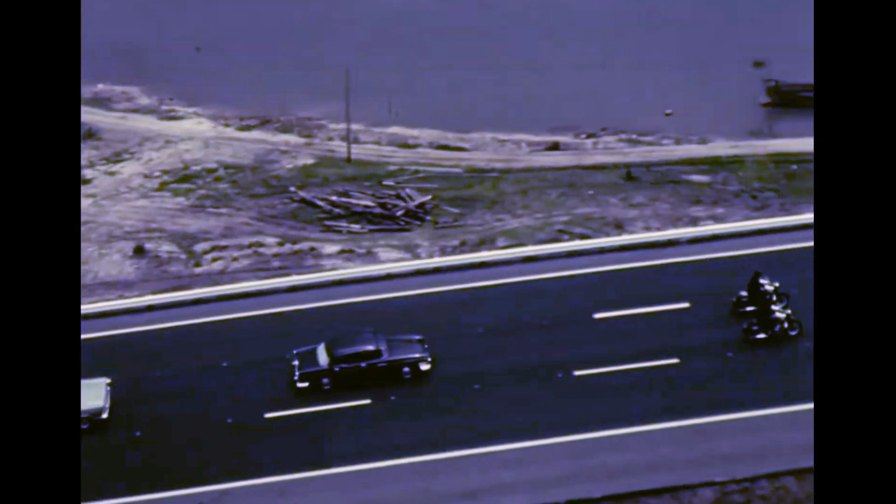Before the motorist could enjoy facilities such as these, many people in various occupations combined their knowledge and skills to plan and execute works of great magnitude. This is the story of those people and the job done by them.

Sydney, now one of the world's largest cities, is the centre of commerce in the state of New South Wales, and there has always been a need for a connection between the state capital and Newcastle, the state's second city and big industrial centre, 100 miles to the north. Early access between the two cities was by sea.

Road connection followed slowly with the old Putty Road in 1820, Wollombi to Singleton in 1826, Wiseman's Ferry to Maitland in 1829, Gosford to Maitland in 1841, and the St Albans route in 1844, all passing around the upper reaches of the Hawkesbury and its tributaries.

A shorter route via the Pacific Highway used a vehicular ferry over the Hawkesbury. The highway, with its easy grades and best possible pavement of the day, was hailed as a great engineering achievement and was a boon to motorists in the 1930s. The Peats Ferry Bridge replaced the ferry in 1945. With post-war development and the increased use of motor vehicles, the capacity of this road was soon outstripped.

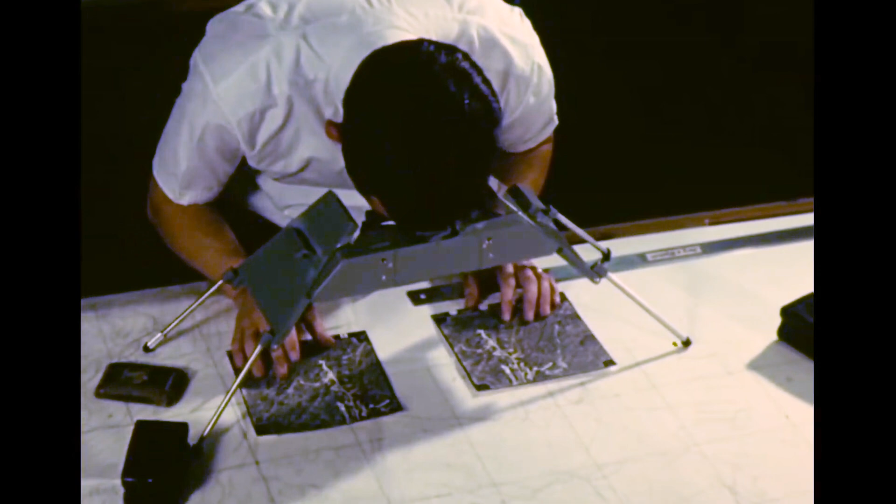In the Department of Main Roads Drawing Office, the road location was fixed, a task made extremely difficult by the need to accommodate an expressway and a highway on the narrow, rugged, steep neck of land between the Hawkesbury and Mooney Creek. Steel splines were manipulated on the contour plans, and aerial photographs examined to achieve the best alignment.

Particular details were examined by constructing models from corrugated cardboard. The Abbott apparatus, comprising cardboard cross-sections supported on retort stands, also assisted in the design. Detailed drawings were prepared. The final plans and specifications were then handed over to the resident engineer of the construction organisation.

The expressway north of the Hawkesbury was built in 3 sections from Mooney Point to Calga, connecting with the new route to Newcastle. A contract was let in 1963 for the construction of the first section of just over 4 miles between Mooney Point and Mount White. This section included an interchange at Mooney Point. It was here at Mooney Point that work commenced.

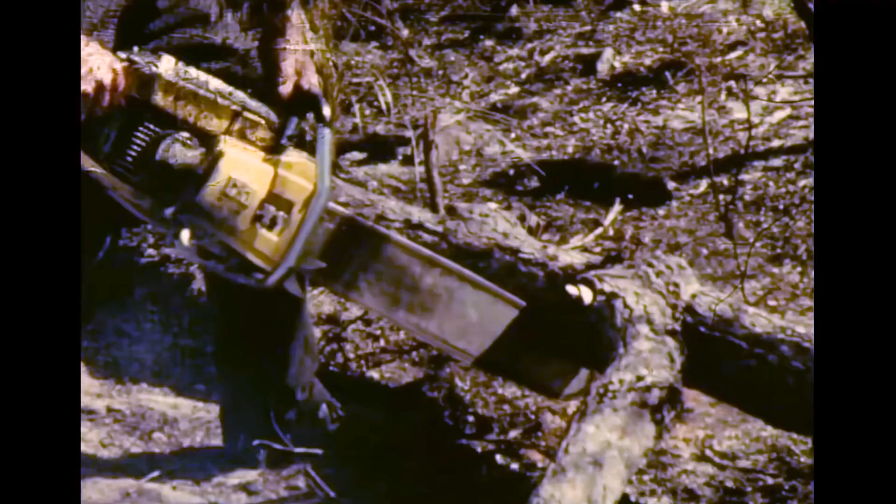Engineers inspect the site at the start of construction. The first operation was to clear the area of timber, which was felled mainly by chainsaw. The width of clearing was kept to a minimum and debris burned within the cleared area.

Before earthworks could proceed at full pace on Section 1 of the expressway, 4 lengths of the existing highway had to be relocated, requiring the construction of 2 miles of road through very rugged terrain, which involved the working of heavy earth-moving plant in confined areas and on steep slopes. Material was moved from cuttings to fills by bulldozers and motorized scrapers.

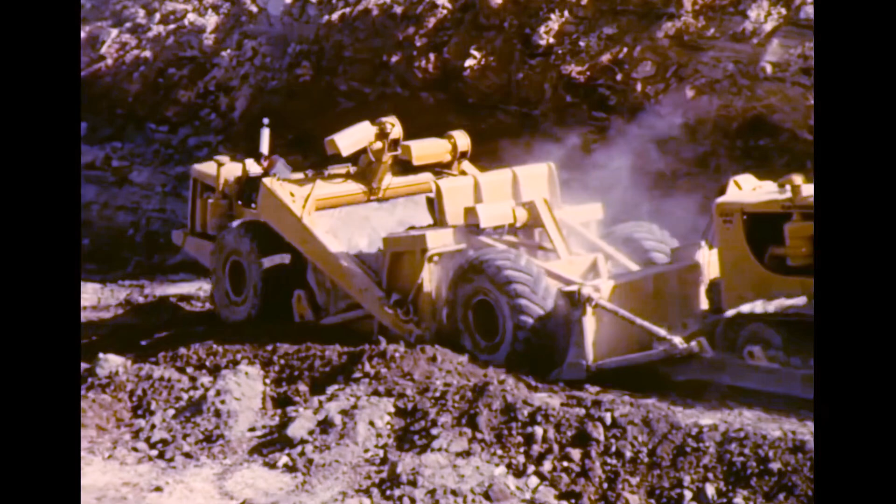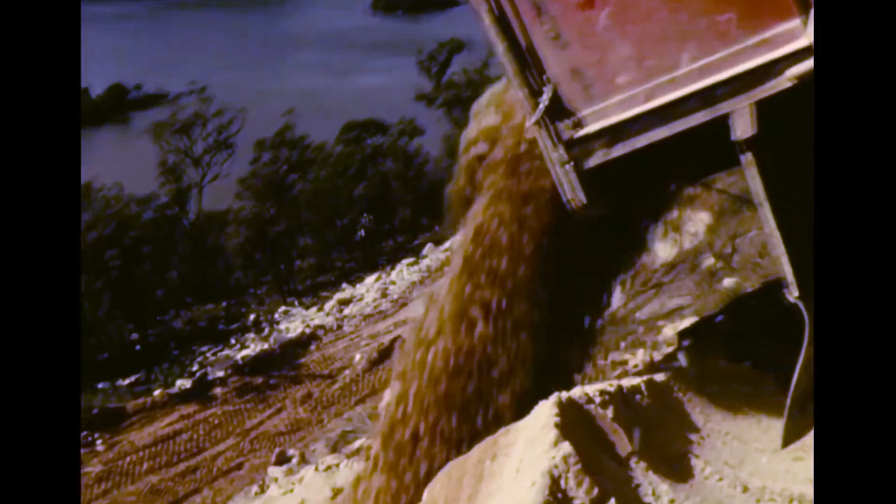When earth-moving plant crossed the existing highway, it was essential in the interests of safety to control the flow of traffic. Rock ledges were removed by drilling and blasting. Tip trucks transferred material from cuts via the existing highway to the fills. After spreading, the material was thoroughly compacted by rolling.

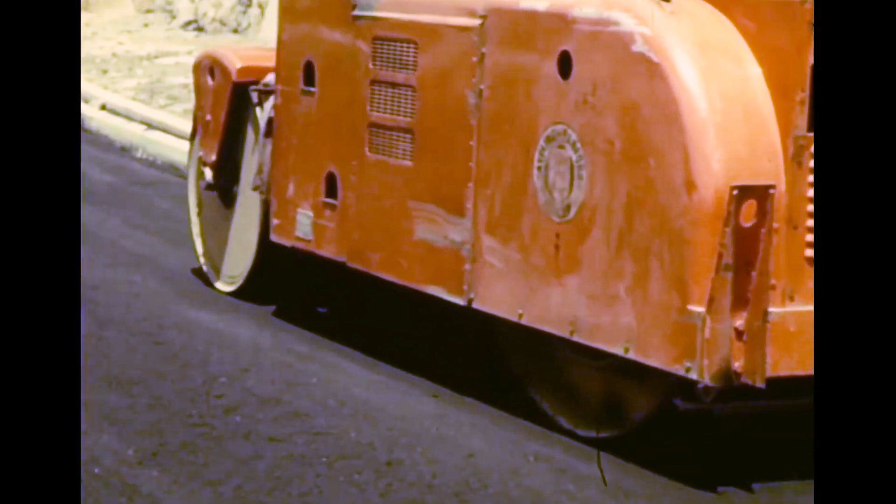Retaining walls constructed with local sandstone block or concrete crib units were required at some locations to support fills. The relocated lengths of highway were paved with asphalt before being opened to traffic. Bridges were constructed concurrently with the relocation of the highway. At Mooney Point, a pre-stressed concrete structure was being built. This shows the completed Mooney Interchange Bridge.

During construction, steel reinforcement cages for footings and columns were placed in trenches, previously excavated to solid rock. Concrete was batched at a plant near the expressway. Mixing was carried out in transit mixers during transport to each bridge site. Concrete was discharged from the transit mixers into hoppers for placing into formwork.

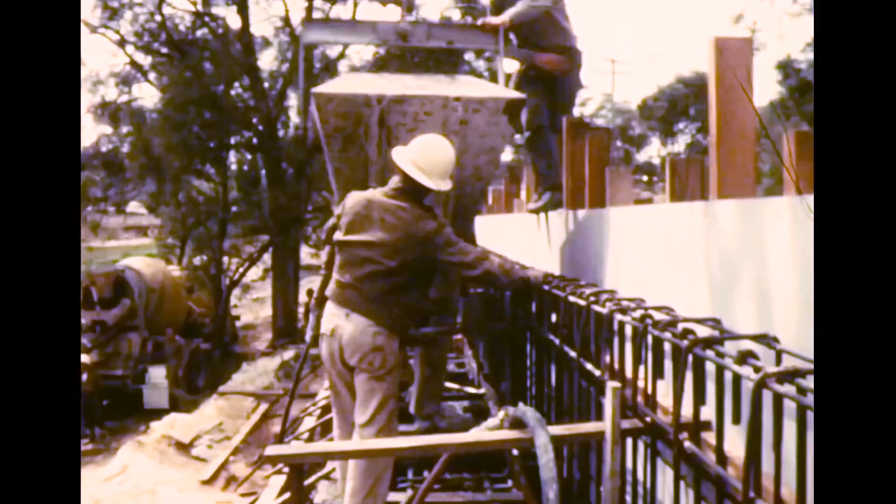Meanwhile, at Jolls Lookout, 2 miles north of the Hawkesbury River, twin bridges, each of 7 spans, were constructed. The narrow ridge between Hawkesbury River and Mooney Creek was not wide enough to support an expressway fill. Bridging was the economical solution. Transverse pipe culverts were constructed prior to commencement of full-scale earthworks on the expressway.

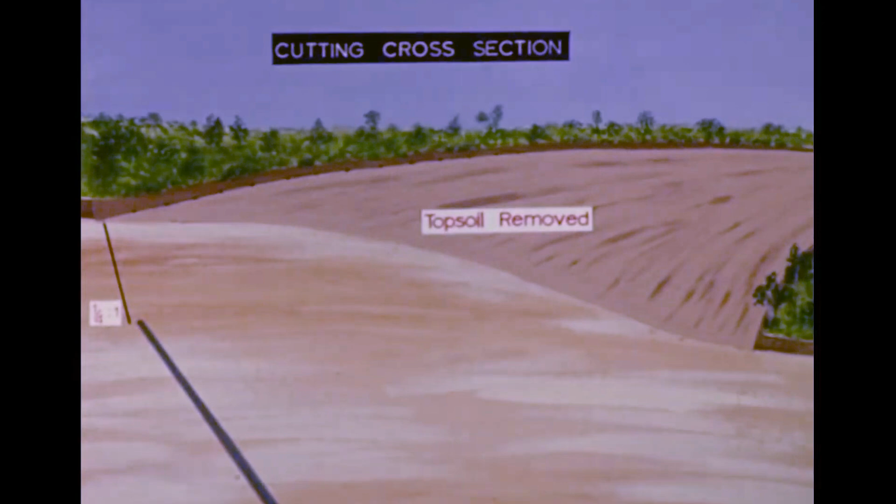Before excavating cuttings, the area was cleared of vegetation. The topsoil was removed and the rock was drilled at a 1/4-to-1 slope for pre-splitting with explosives to form batters. Softer rock was loosened by ripping and the cutting was excavated to median level. The median batters were drilled for pre-splitting. The rock was drilled for loosening with explosives and was removed from both sides simultaneously. The cutting was excavated to subgrade level, but the median was retained as a rock island.

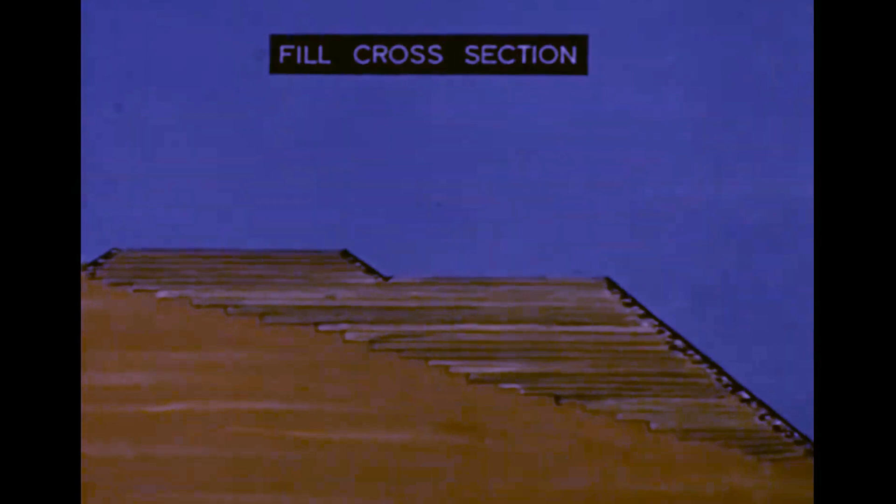Before commencement of fills, the area was cleared of vegetation. Topsoil was removed and the surface benched at 1:10 slope to support the toe of the fill. Material was placed in layers 8 inches thick, the natural surface stepped or roughened in advance of each layer. A rock facing was provided 4 feet wide in advance of each layer as the fill progressed, and the fill slope was generally 1.5 to 1. A sub-base layer, 12 inches thick, was placed above subgrade level using selected sandstone.

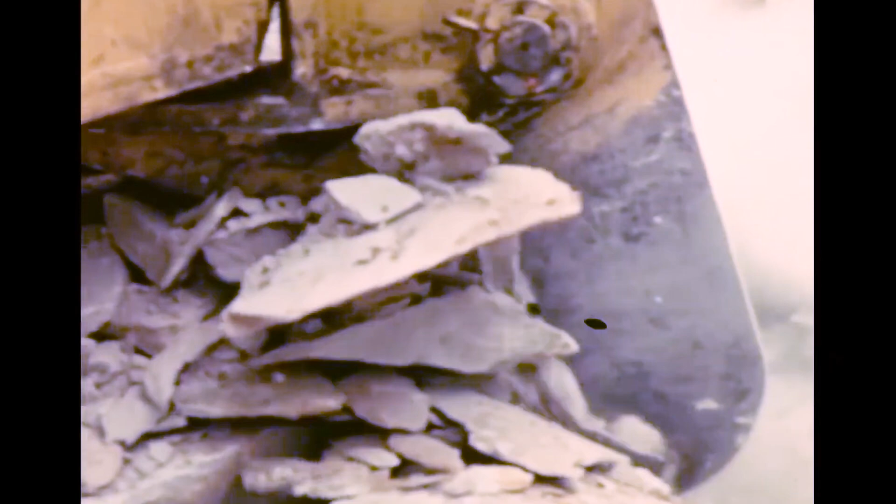On the first section of the work, 2 million cubic yards of rock had to be excavated and moved to fills. In the early stages, all rock was loosened by ripping. Later, it was supplemented by drilling and blasting. The series of delays introduced into each blast resulted in good fragmentation. A mechanical shovel of 2.5 cubic yards capacity was used to load broken rock into trucks for hauling to the fill.

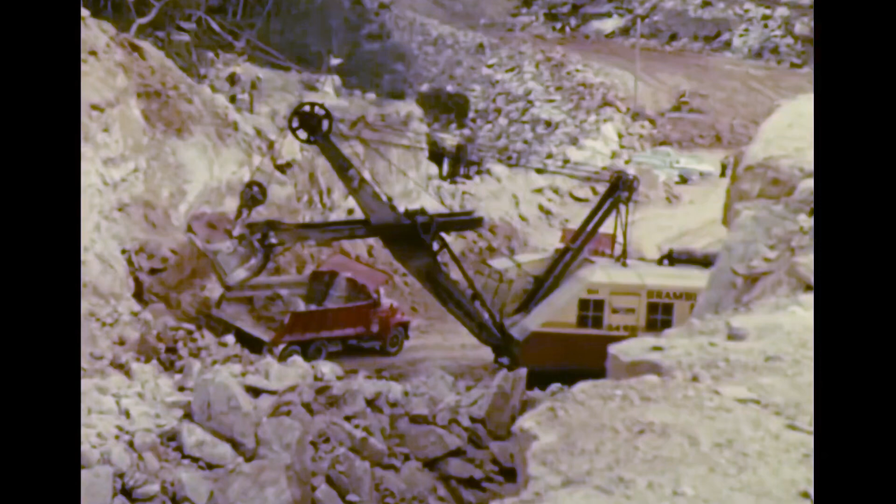Mid-1964, 12 months after commencement, work was well advanced over the full length of Section 1. To give the motorist a longer length of expressway at an earlier date, it was then decided to accelerate the project by proceeding immediately with the construction of Section 2, 1.6 miles long at Mount White, which included the Mount White interchange. One length of the existing highway required relocation. Section 2 was constructed by the Department of Main Roads by direct control, and an engineering organization and depot were established at Mooney.

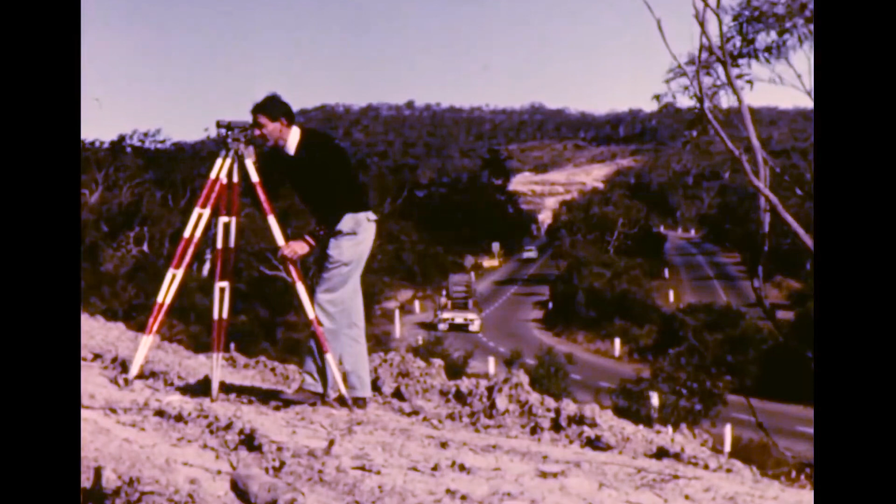Operations were planned in detail using the critical path method to determine the most efficient program for the work. A computer was used to assist with the analysis. Bar charts were produced for use in job control and for recording progress on the work. Earthworks were carefully controlled using survey instruments and coloured profiles to define batter slopes.

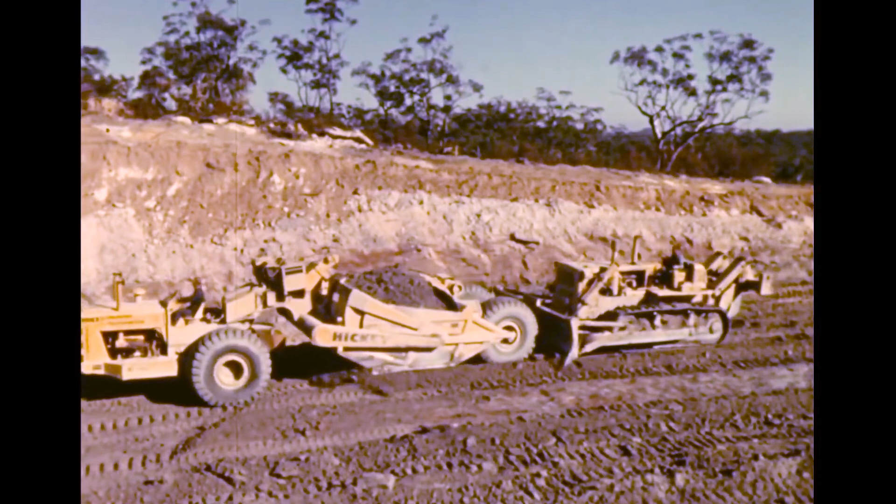About 50% of the rock was loosened by ripping, using the heaviest tractors available up to 425 horsepower. These tractors were fitted with rear-mounted hydraulic rippers using a single tine. Material loosened by ripper was moved by motorized scrapers. These units were capable of carrying up to 30 cubic yards of material at 30 miles an hour. A typical team consisted of 5 scrapers with a tractor dozer push loading and 1 or 2 ripping tractors. Material was discharged from scrapers on the run and spread out in thin layers using bulldozers before being rolled.

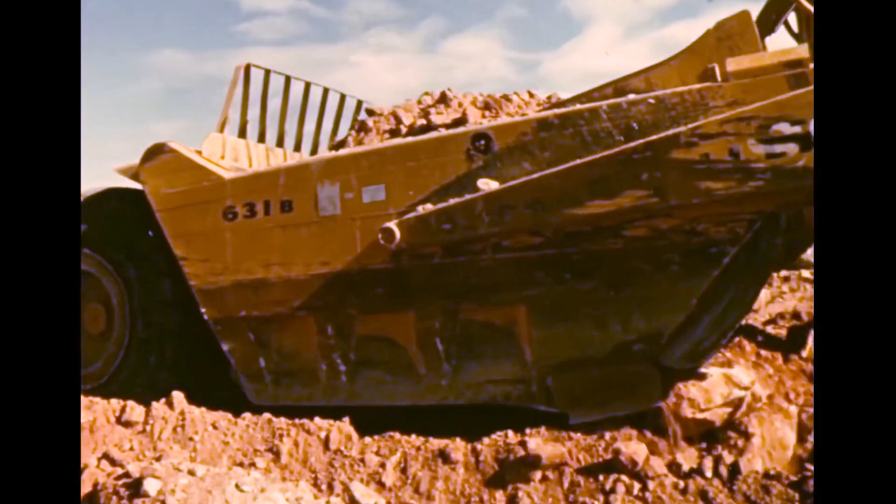With this equipment, outputs of up to 10,000 cubic yards of earthwork per day were achieved. Rock which could not be economically ripped was loosened by drilling and blasting. Holes 2.5 inches in diameter were drilled using crawler track-mounted drills capable of penetrating at more than 1 foot per minute. Holes were generally 14 feet deep, but increased to 30 feet when rock strata was favorable.

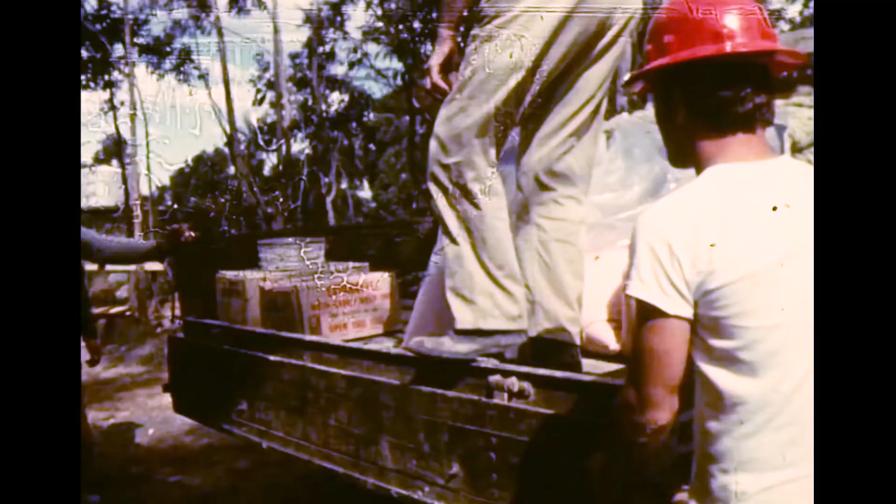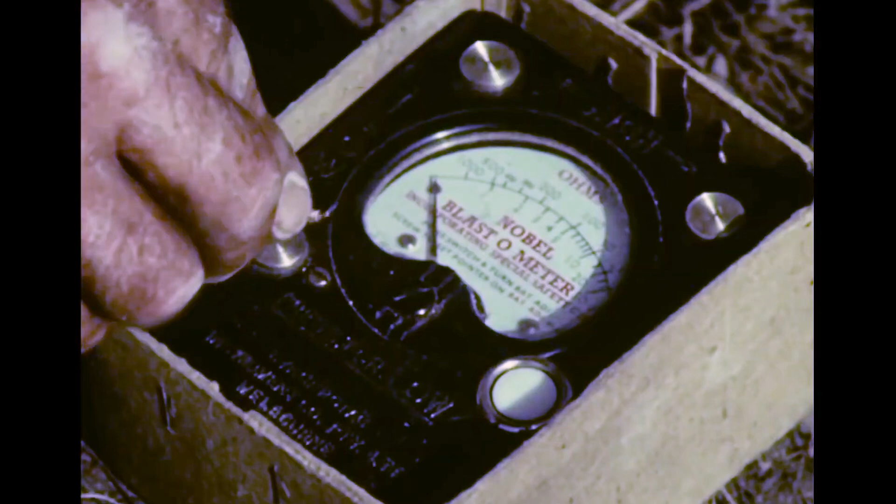The explosive used was generally an ammonium nitrate fuel oil mixture, prepared in small batches near the site. The main charge was primed with gelignite, connected by instantaneous detonating fuse to electric millisecond delay detonators. To avoid misfires, detonator circuits were tested by measuring their electrical resistance. The shots were then fired.

Rock which was loosened by blasting was generally too large for moving by scrapers, so it was loaded into rock buggies or trucks for hauling to fills. A mechanical shovel was used for loading rock, but generally front-end loaders of 2 to 4 cubic yards capacity were found more suitable.

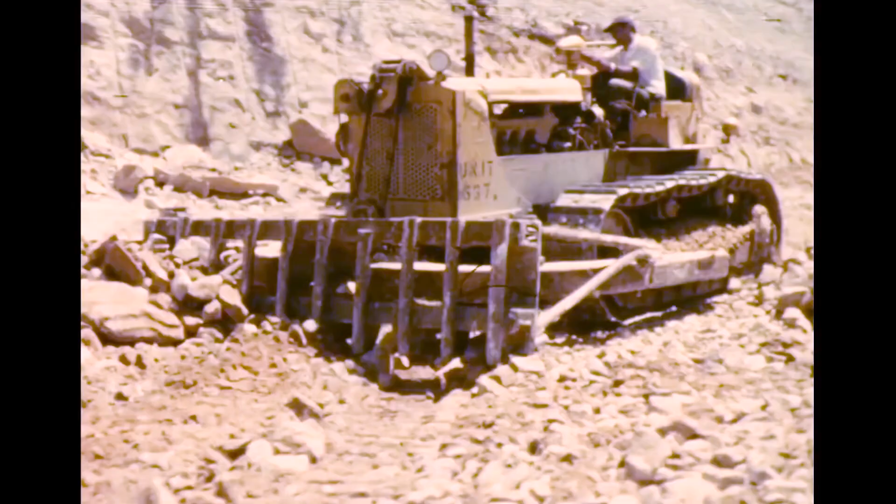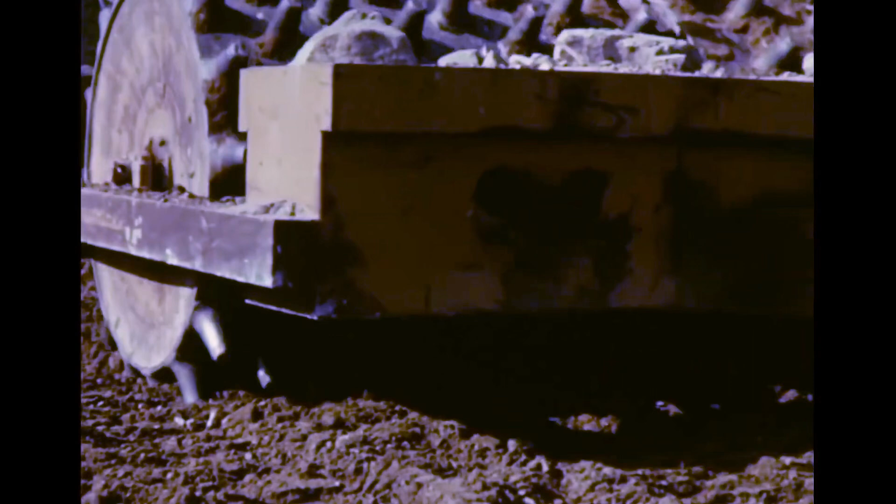Bulldozers fitted with rock rakes were used to separate the larger rocks. These were moved to the outer edge to form a rock facing about 4 feet thick on the fill slopes. This process provided a scour-resistant surface. The finer material remaining in the body of the fill was spread by bulldozer and watered to bring it to optimum moisture content. At this stage of the operation, sheep's foot rollers compacted the material to its maximum density to prevent later settlement. The action of this type of roller is to compact each layer from the bottom upwards.

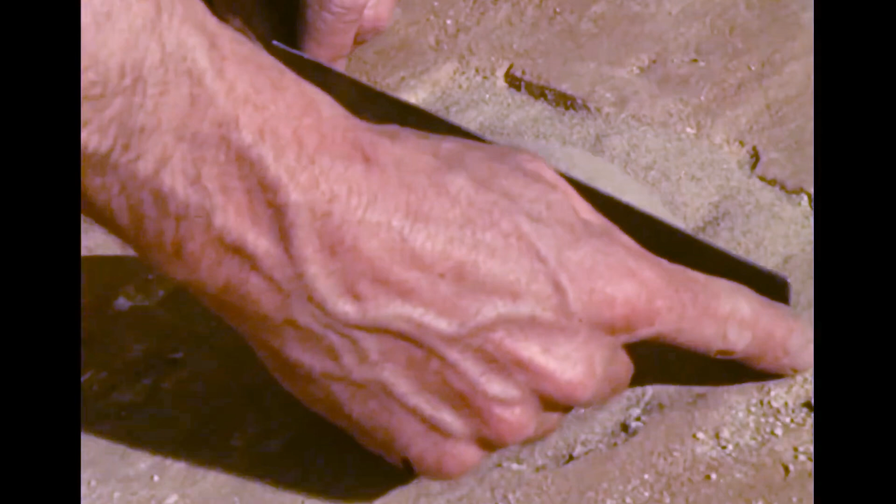Each layer of the fill was tested in situ for density. 2 methods were used. The sand replacement method involved the removal of a sample of material for drying and weighing. It was replaced by sand of known density to determine the volume. In the second method, a nuclear gauge determined density by counting gamma rays emitted from a radioactive source and backscattered by the fill material.

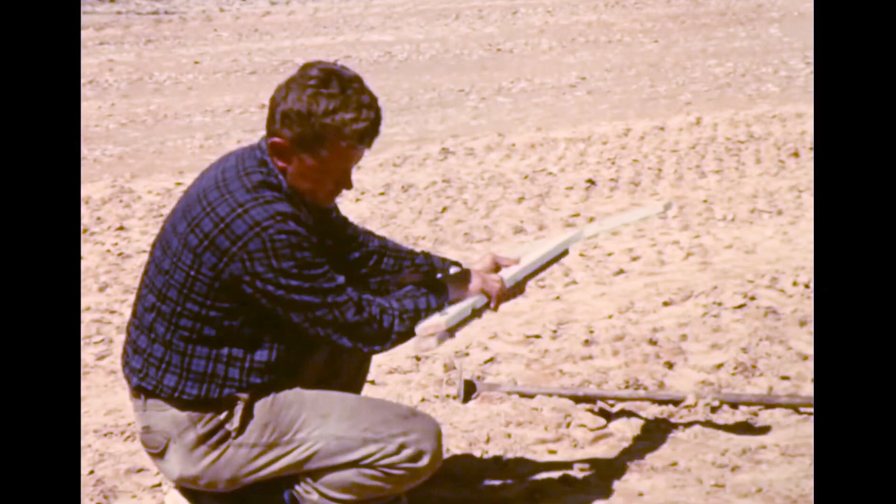Cut batters were cleaned down with crowbars and compressed air to dislodge any loose material which might later be a hazard to traffic. The top of the subbase was carefully checked for level and shape. The surface of the subbase layer was trimmed to preset levels by grader and the layers compacted by rolling. Grid rollers and steel vibrating rollers assisted with compaction. Earthwork was now well advanced throughout the whole length between Hawkesbury River and Mount White.

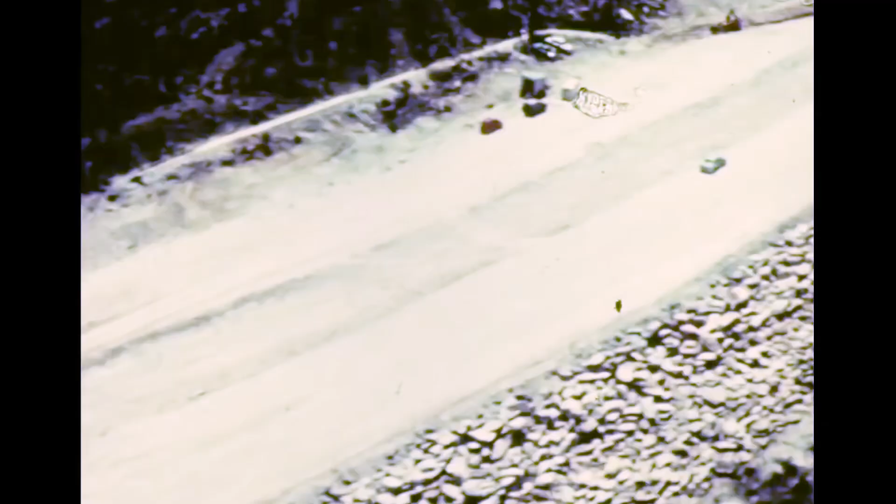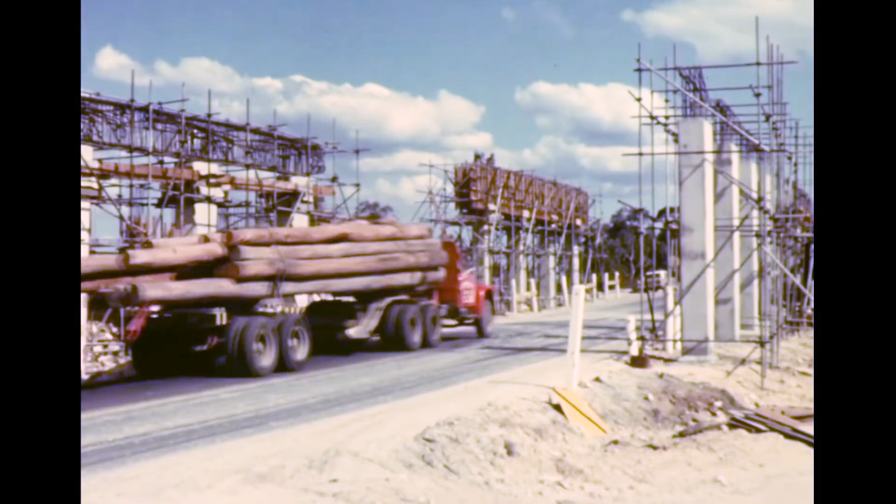On Section 2, earthworks and bridge construction proceeded concurrently. 1 mile south of Mount White, where the expressway crosses the existing highway, twin bridges were constructed. These twin bridges over the existing highway were built without interference to traffic. At Mount White Interchange, a 2-span reinforced concrete bridge was constructed to carry ramps across the expressway. This bridge was of concrete cast in situ on tubular steel falsework.

To keep water clear of the expressway, concrete drainage structures were provided. Catch drains were constructed along the tops of cuttings to lead water into natural water courses, which drained into transverse culverts located under the road. Longitudinal culverts were placed to carry water falling on the road clear of the carriageway and shoulders. Curbing and guttering were provided through cuttings to collect water and lead it through gully pits into culverts. Subsoil drains were provided to intercept subsurface water, median drains to collect water discharged in the median area, and precast concrete drainage units to carry water down embankment batters.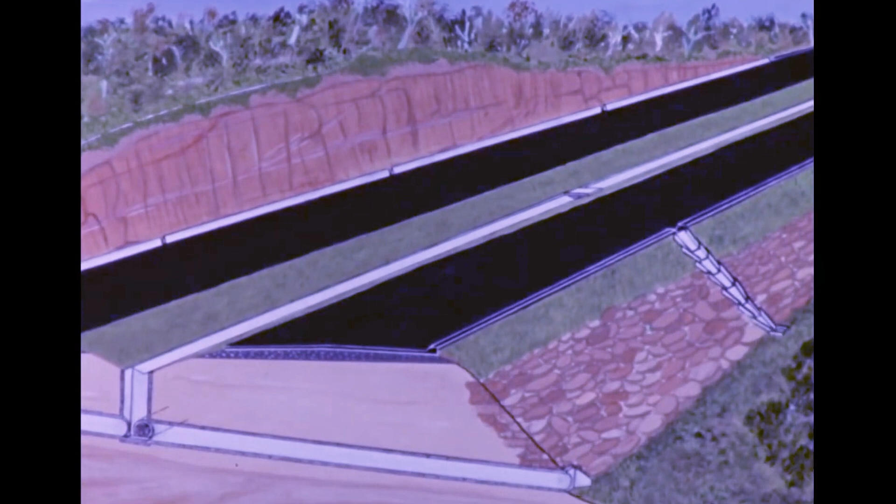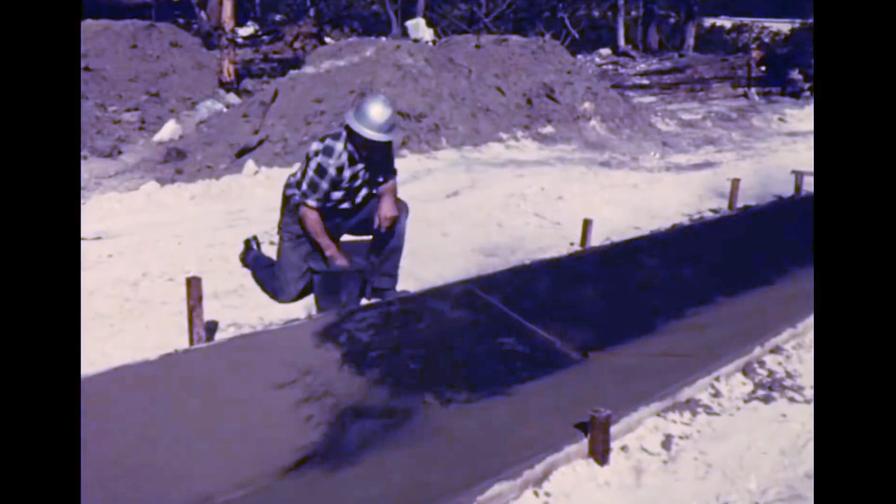Catch drains on steep grades were constructed in concrete to prevent scouring. Some median drains were also constructed in concrete. The concrete in both catch drains and median drains was coloured dark grey to blend into the natural surroundings. Excavations were made for longitudinal culverts. The culverts consisted of precast concrete pipes, bedded on sand and carefully aligned and graded.

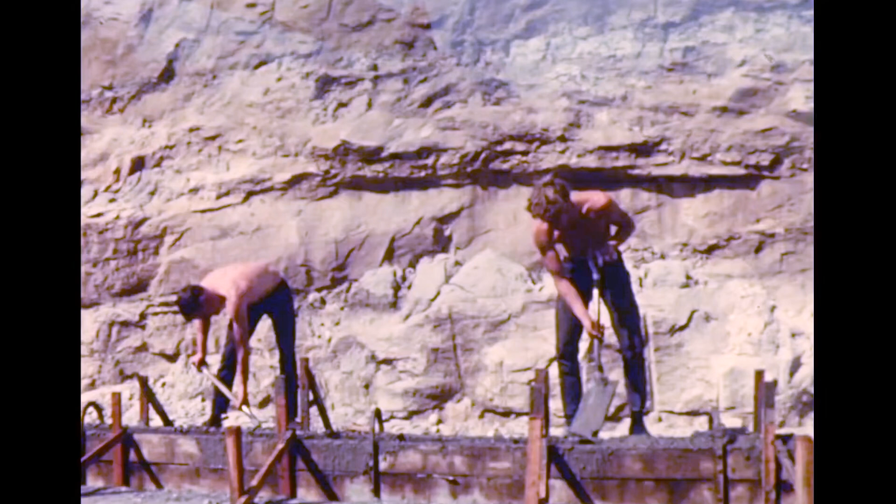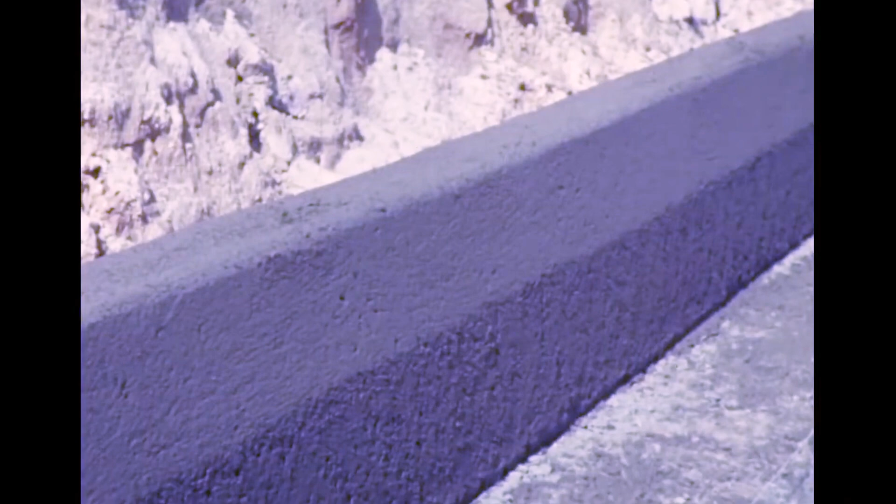Concrete curbs and gutters through cuttings were initially constructed by pouring concrete into stationary forms. Later, the more economical and modern method of extruding concrete from a machine was used. Subsoil drains consisted of earthenware pipes laid with pervious joints in trenches. They were backfilled with specially graded filter material.

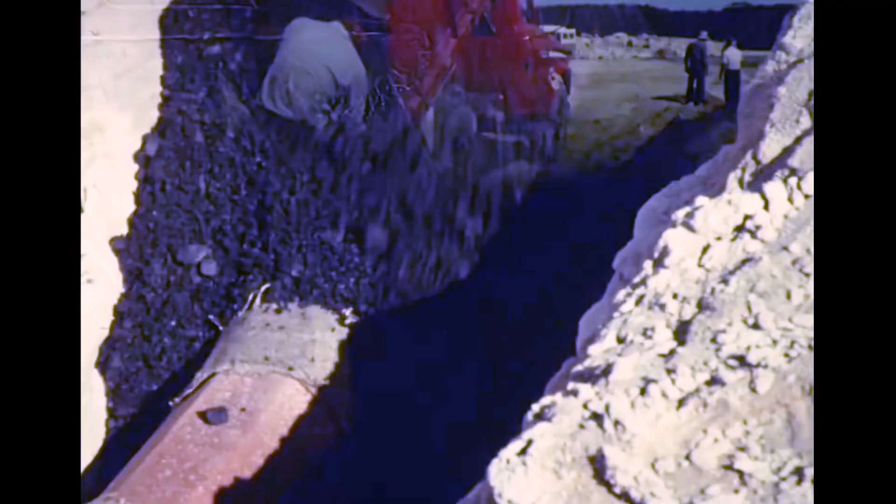At the works depot, concrete drainage units were precast. At the site, they were placed on fill batters to carry surface water clear of the road formation without causing scour.

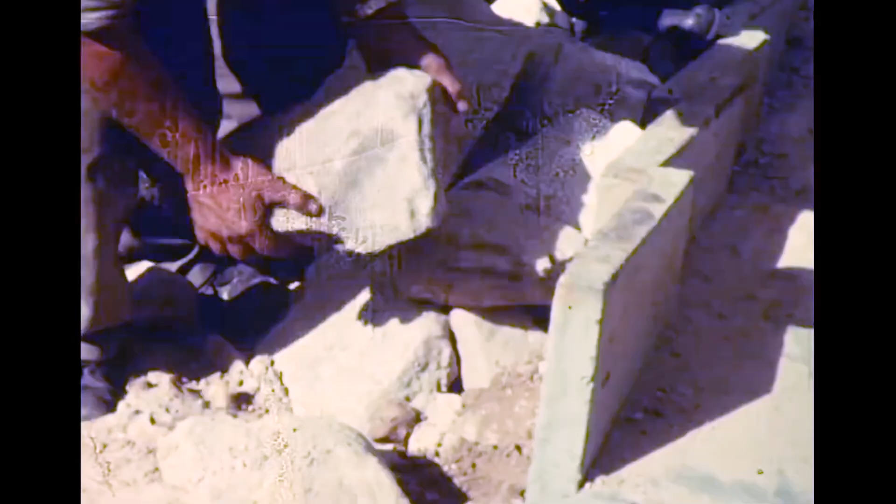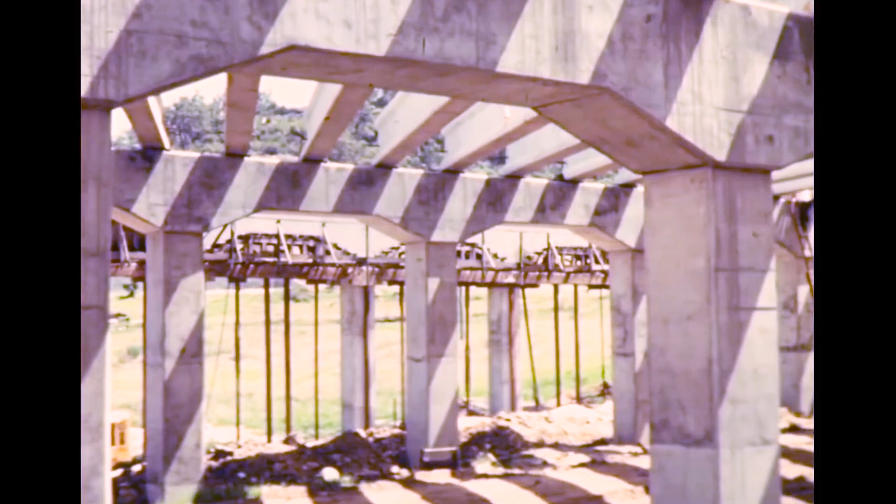Meanwhile, work was proceeding on major structures. For Mooney Interchange Bridge, pre-stressed concrete girders were lifted into position on the headstocks. The ends of the girders were seated on neoprene pads set in cement mortar on top of the headstocks. Due to the widening of the expressway near the toll barriers, Mooney Interchange Bridge tapers in width from 205 feet to 221 feet. On Giles Bridge, headstocks were completed, ready to receive the girders which were manufactured some distance from the site.

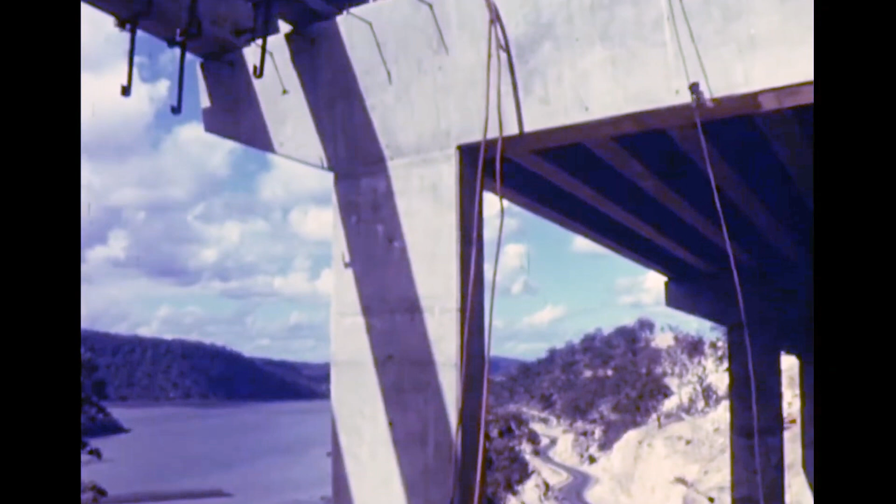On South Mount White Overbridge, units 45 and 50 feet long were lifted into position whilst traffic continued to flow on the highway beneath. Work continued on Mount White Interchange Bridge, which features a box girder cast in situ type of construction.

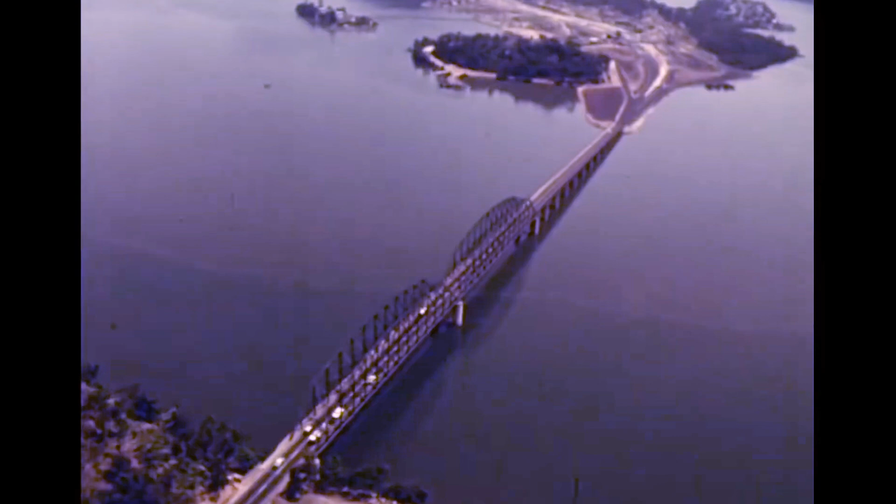By mid-1965, from Hawkesbury River to Mount White, the expressway was taking shape. The difficulty in establishing an expressway through this rugged terrain is here evident.

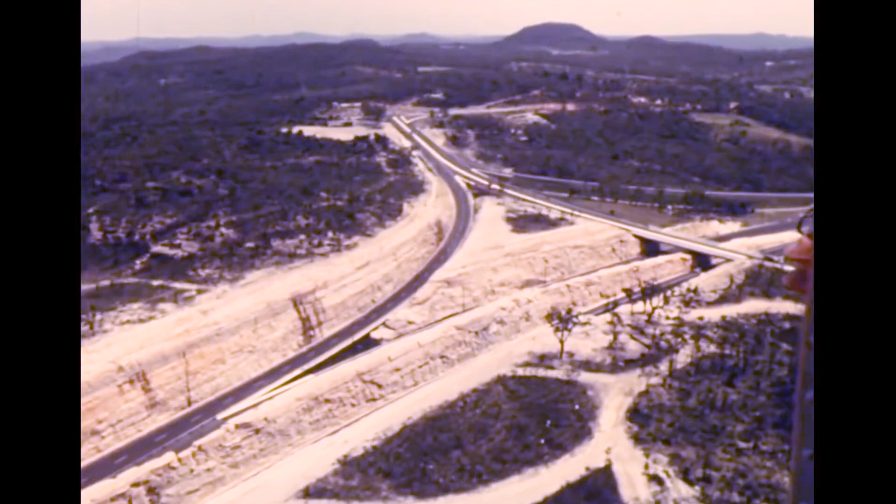At this stage, construction commenced on Section 3 between Mount White and Calga, a length of 3.5 miles. This section included two interchanges, one where the ultimate route will turn towards Gosford, and the second at Calga, where traffic continuing to Newcastle and the north separates from traffic proceeding direct to Gosford. Four relocations of the existing highway, totaling 2 miles, were necessary on Section 3.

On this section, 2 million cubic yards of rock was excavated and moved from cut to fill in a period of less than 12 months. Daily output increased as more advanced equipment became available and greater experience was obtained.

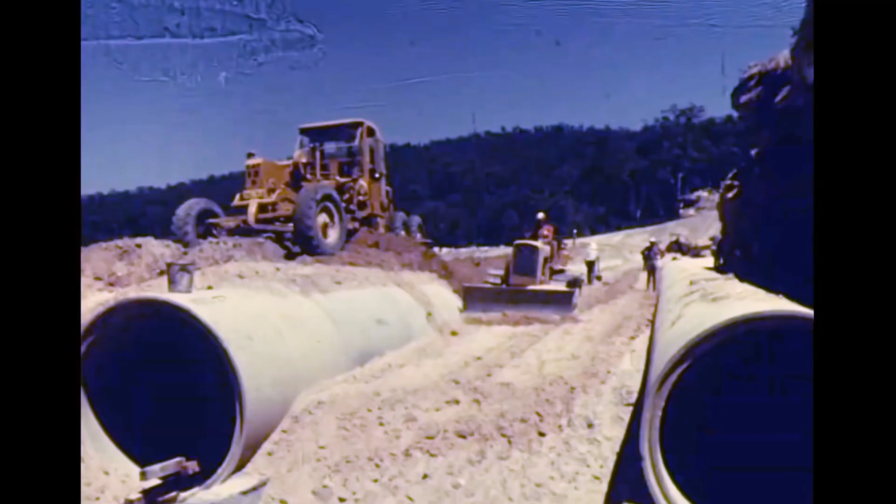At one time, these sandstone ridges were used by Aborigines for ceremonial purposes, and their rock engravings were frequently encountered during construction. The engravings were carefully recorded before blasting. In some cases, engravings were cut out and removed for preservation and public exhibition.

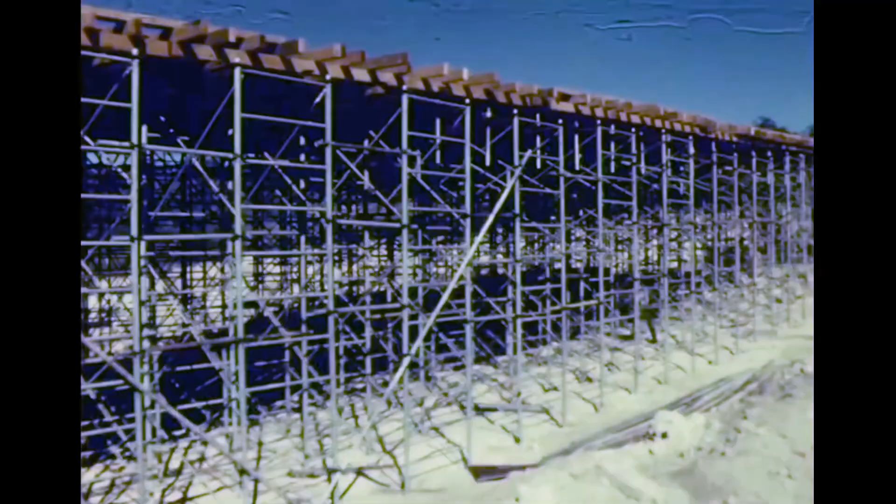Section 3 includes 3 bridges. One, the Stub Bridge, crosses the ultimate expressway route where it turns towards Gosford. This is a post-tensioned concrete box girder structure. The single pier is V-shaped. Tubular steel falsework was erected to support the superstructure during concreting.

The next bridge carried the existing highway over the expressway between Mount White and Calga. It is a post-tensioned concrete structure with a long central span across both carriageways. Piers and abutments were constructed of reinforced concrete cast in situ. Precast concrete sections were brought to the site, assembled on the ground, and post-tensioned to form girders.

The third bridge was at Calga, where the expressway crosses the interchange ramps. It has 3 spans of steel girders. The pier columns consisted of reinforced concrete inside concrete pipes, which took the place of formwork.

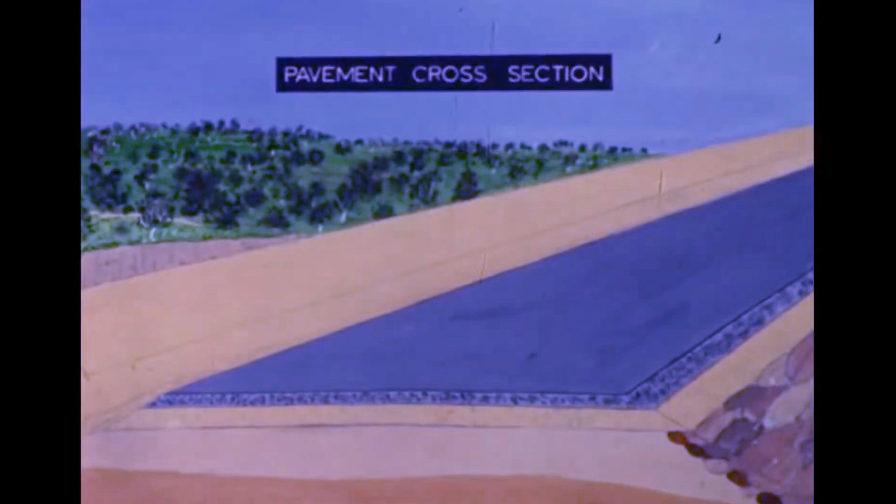Pavement construction was now proceeding on sections 1 and 2. The sub-base of selected sandstone, 12 inches thick, was trimmed to the required crossfalls. The base course layer of crushed basalt was placed in two 4-inch layers, giving an 8-inch thickness. After accurately trimming the base course, a bituminous surface dressing was applied, using 3/16 of an inch aggregate.

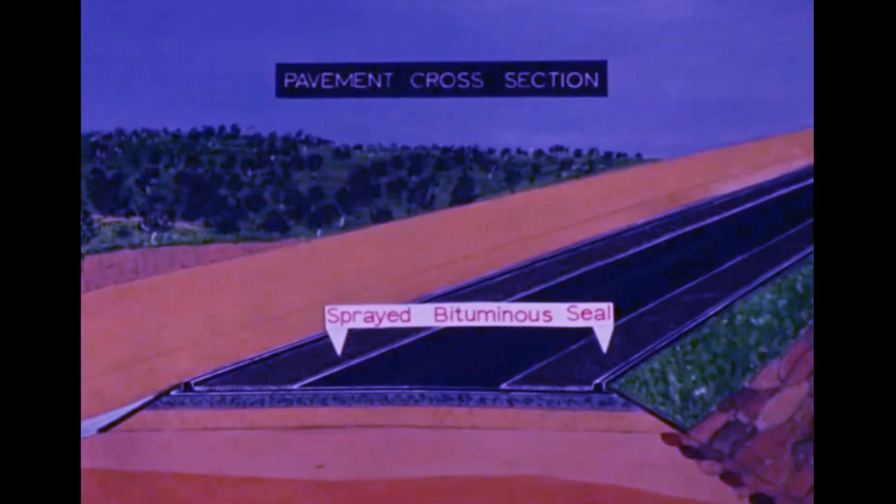The intermediate course of 3/4 of an inch asphaltic concrete was spread 2 1/4 inches thick. Asphalt curbs were provided along edges of the formation. The 10-foot wide shoulders, or breakdown lanes, were surfaced with a sprayed bituminous seal, using a 3/4 inch cover aggregate to give a coarse textured surface, contrasting in appearance and tire noise with the travelling lanes. They were surfaced with 3/8 of an inch asphaltic concrete, laid 3/4 of an inch thick.

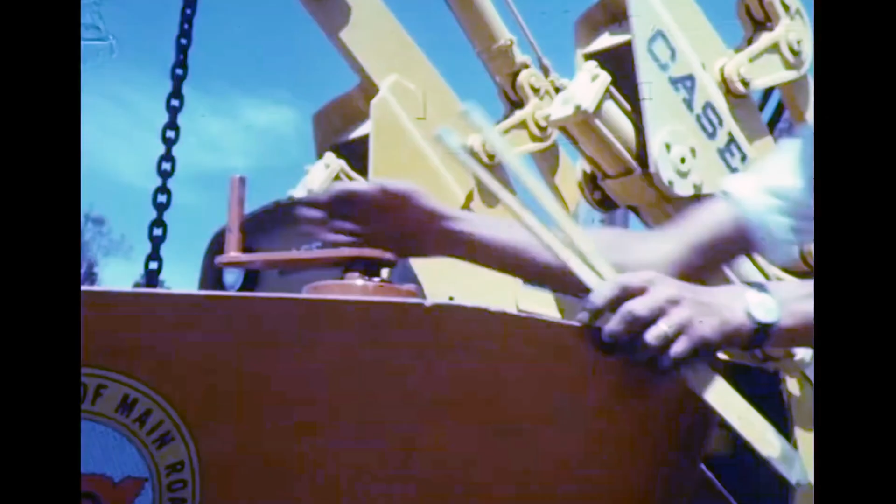A mechanical spreader was used for laying the 8-inch thick base course, which was composed of graded crushed basalt from local quarries. After being watered, the base course was compacted by vibrating rollers. Surface levels were checked.

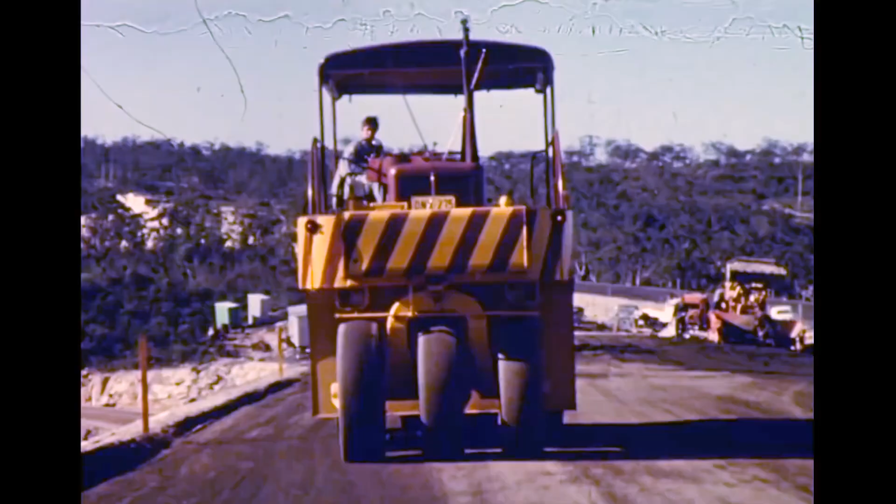Final surface trimming was carried out by grader with further compaction by pneumatic tired rollers. The largest, of 32 tons, provided for varying the tire pressures whilst in motion. A 10-foot straight edge was used to locate variations in the surface. A bituminous dressing was used to protect the surface until the next course could be applied.

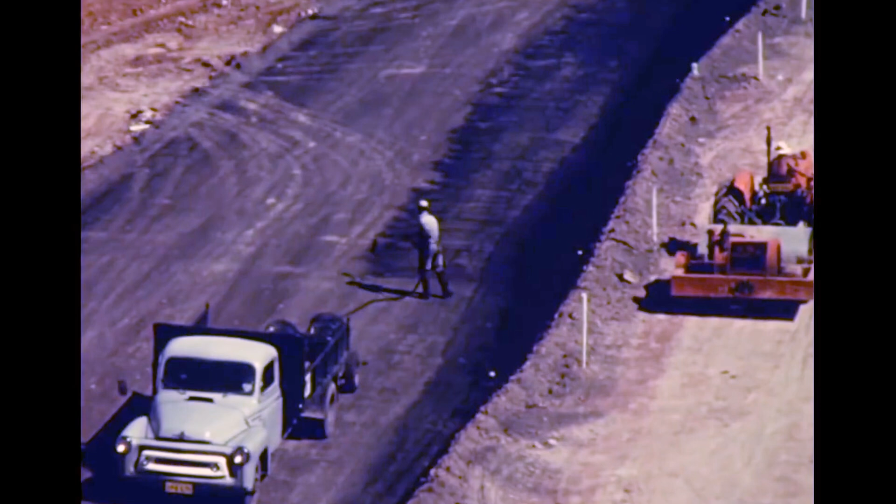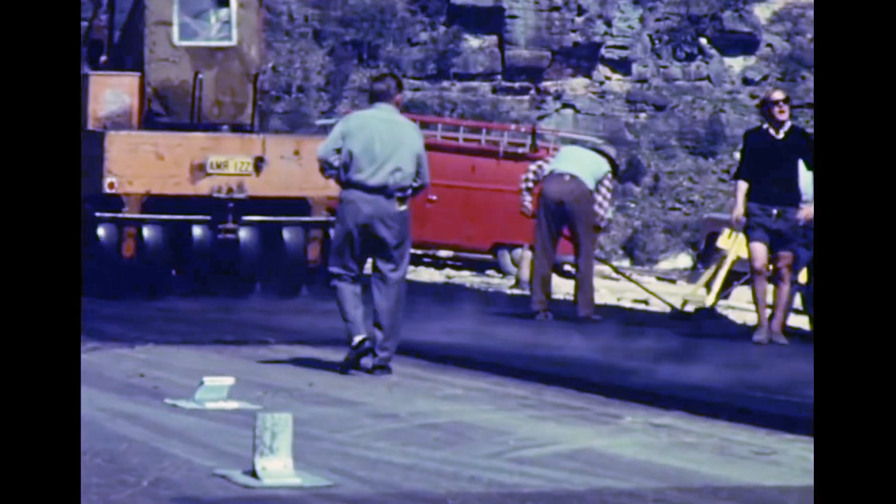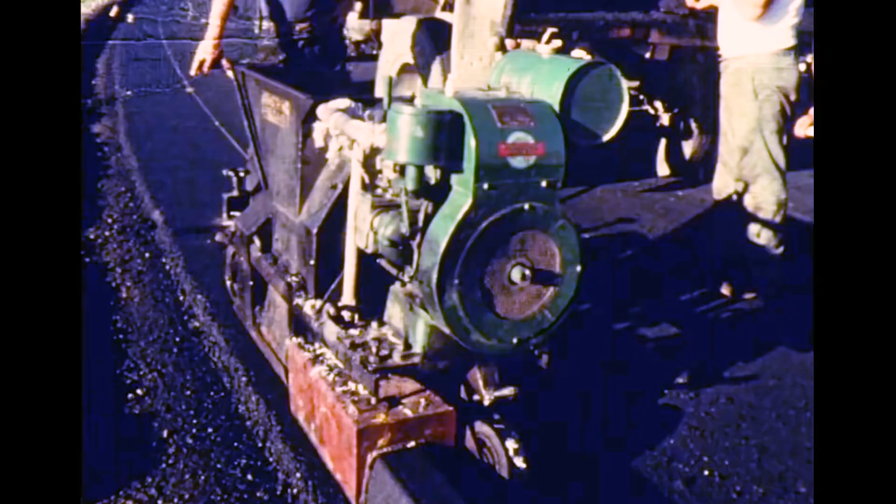Tracks were laid to take an extrusion machine, which was used to place an asphaltic concrete curb on the outer edge of the intermediate course. A manually operated unit was also used for this work.

In the meantime, holes were bored along the edges of all fills to provide for guardrail fencing posts. Application of the final pavement course was delayed until this and other work on the adjacent roadside was completed.

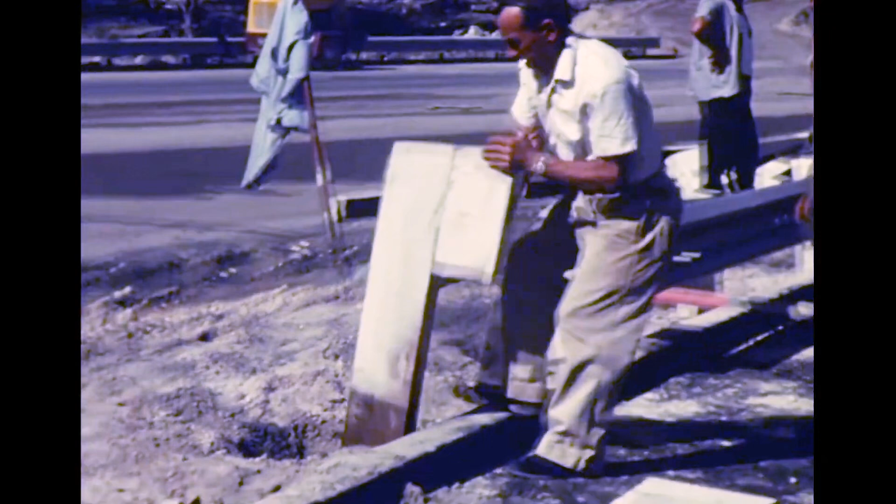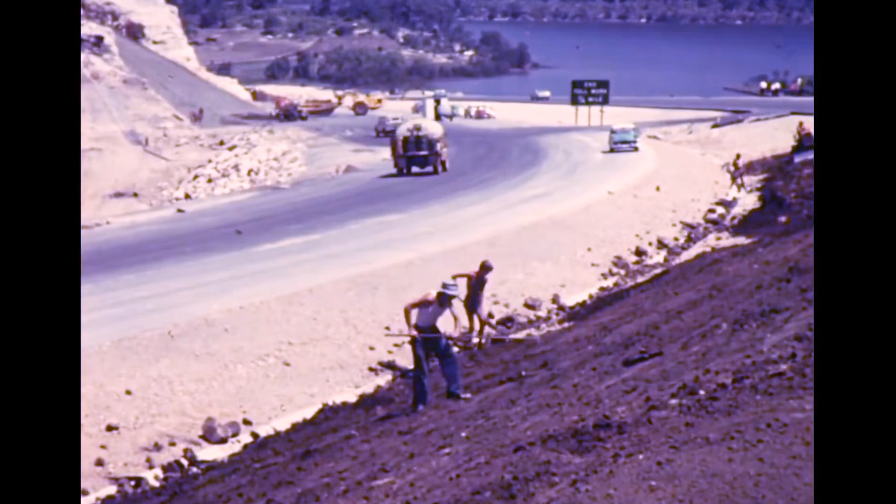The guardrails were secured. The roadside was landscaped to restore it as closely as possible to its original appearance. This work involved spreading of topsoil on fill batters and disturbed areas. Grass seed was planted.

Fertilizer spread, and the area watered. The ground surface was sealed with bitumen emulsion to prevent scour and assist germination. The grass was quickly established. Grass sods protected earth drains, whilst the steeper slopes were planted with indigenous ground covers.

Native trees and shrubs were planted in carefully selected locations to enhance the roadside appearance and reduce headlight glare. Boundaries were fenced throughout to exclude people and stock, as this road was constructed for vehicles only.

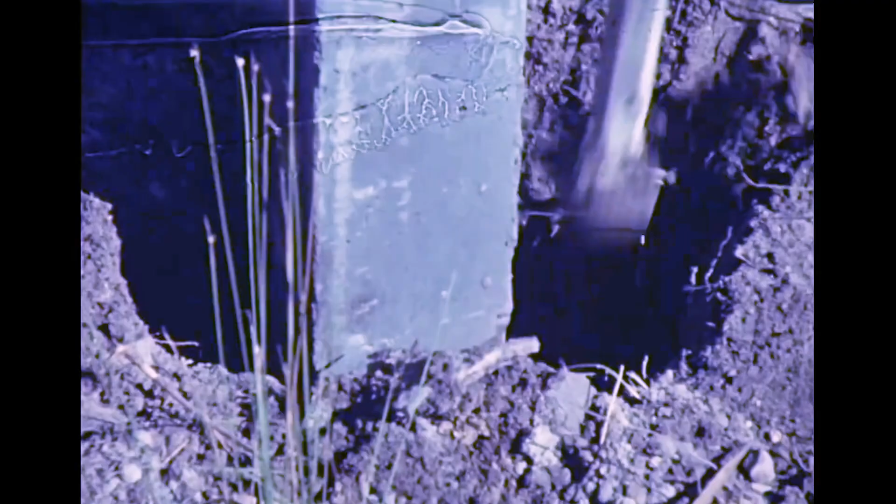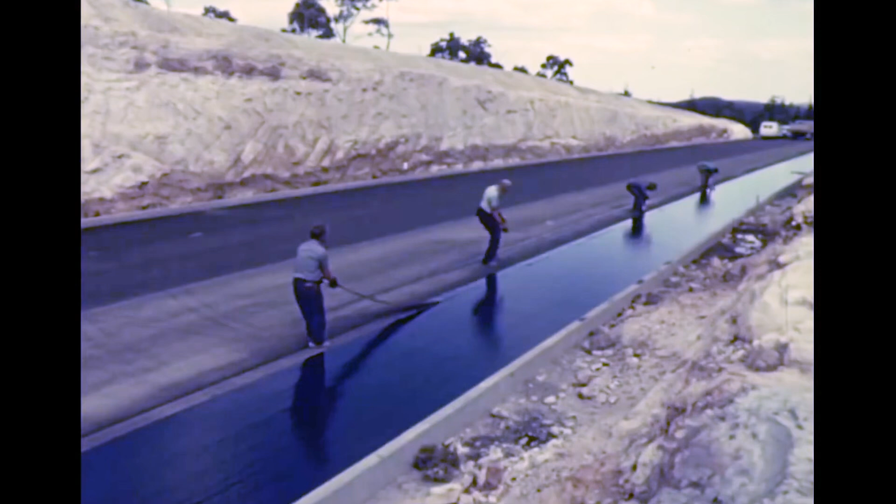Using the extrusion process, concrete mountable curbing was installed at ramps where narrow medians were necessary. Outer edges of the travelling lanes were masked for protection before spraying bitumen on the shoulders. Aggregate was applied directly to the bitumen to give a cover of 1 stone thickness, and then rolled by pneumatic-tired multi-wheeled roller. After rolling, any excess stones were removed by compressed air and brooming.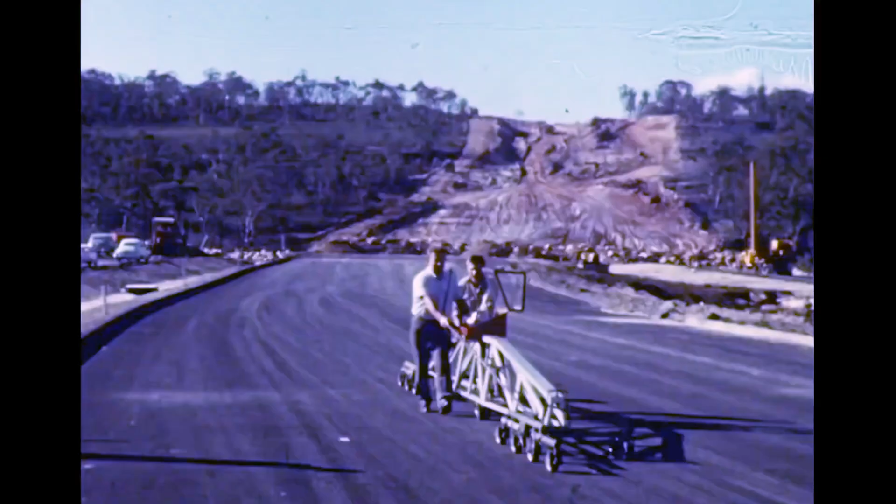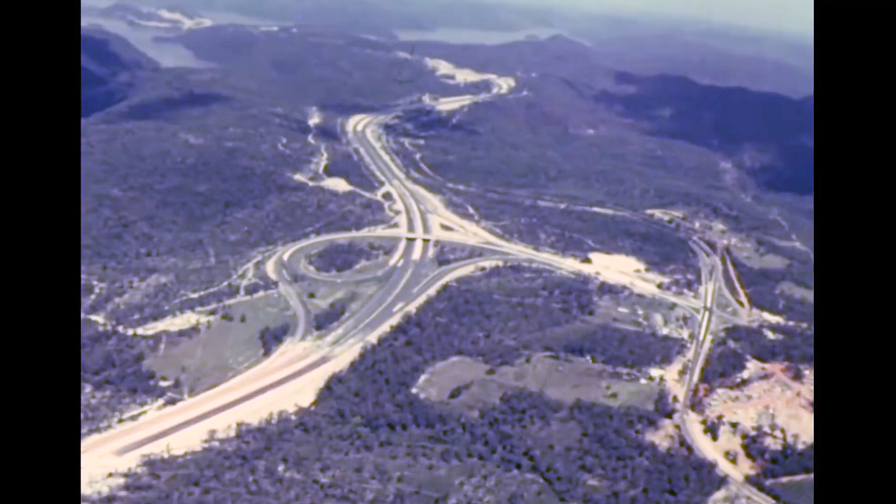Travelling lanes were then surfaced with asphaltic concrete. A profilometer checked the surface to ensure that the final pavement was finished to within very fine tolerances. With the completion of the surface course pavement and the provision of signs, lights and other traffic facilities, the first 2 sections between Hawkesbury River and Mount White were brought to completion. These sections were opened to traffic in December 1965, using an interchange at Mount White to connect with the existing highway until the next section of expressway was completed.

Earthworks then proceeded at an accelerated rate on Section 3. At Mount White, work was continuing on the stub bridge. After formwork for the girders had been erected, cable ducts were placed on the structure. Pre-stressing cables were prepared for insertion into the ducts. The ducts were then lowered into final position. Concrete was conveyed from transit mixer onto the structure by a monorail system.

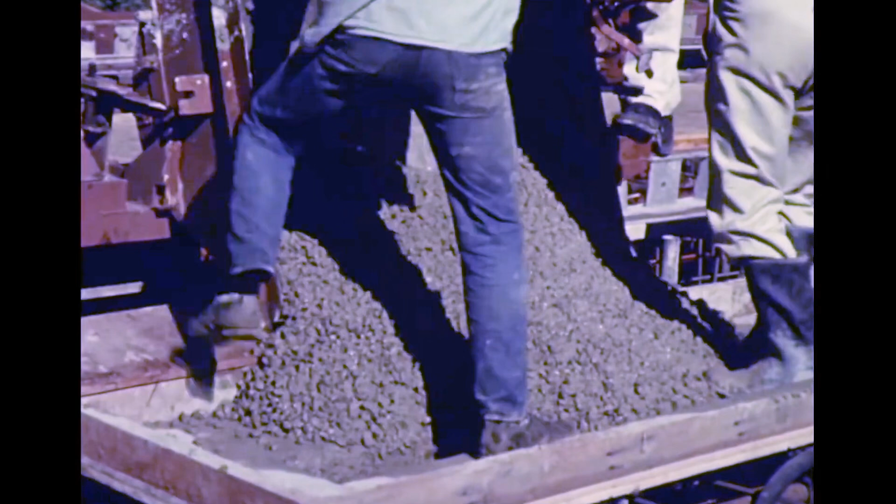And placed into the girder formwork. After concreting, the high tensile steel cables were tensioned. The stub bridge was completed. Meanwhile, at the highway overpass bridge between Mount White and Calga, the girders had been assembled and stressed. They were then moved by jinker from the assembly area to beneath the bridge and lifted into their final position in the structure.

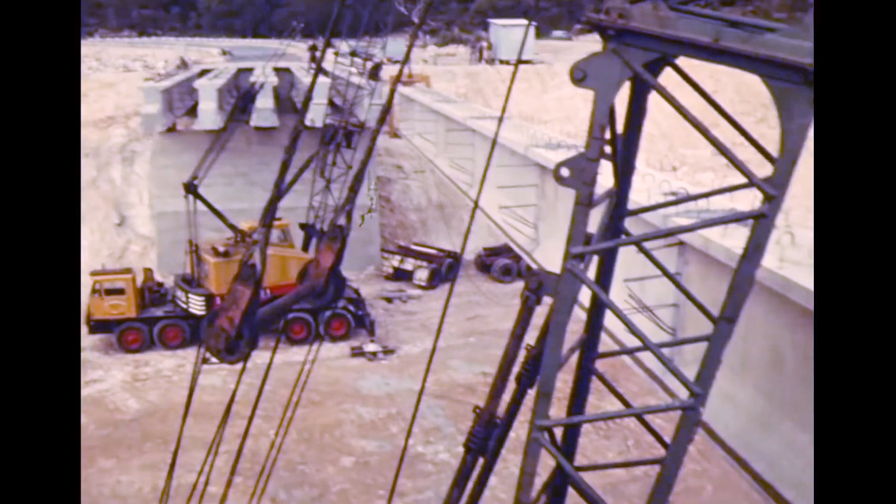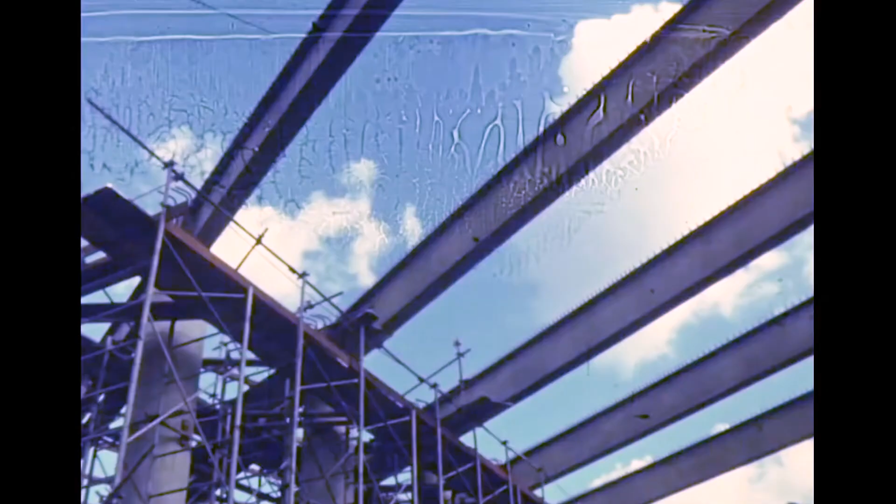Reinforcing steel was then placed in position for the deck. Transit mixers delivered the deck concrete. At the Calga interchange bridge, steel girders were in position. Concrete was placed to form the deck, and workmen applied the finishing touches. The third section of the expressway was then nearing completion.

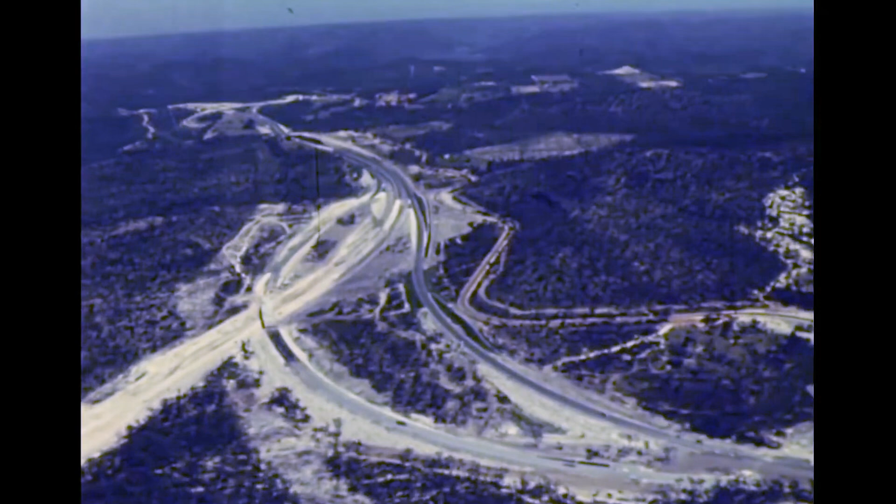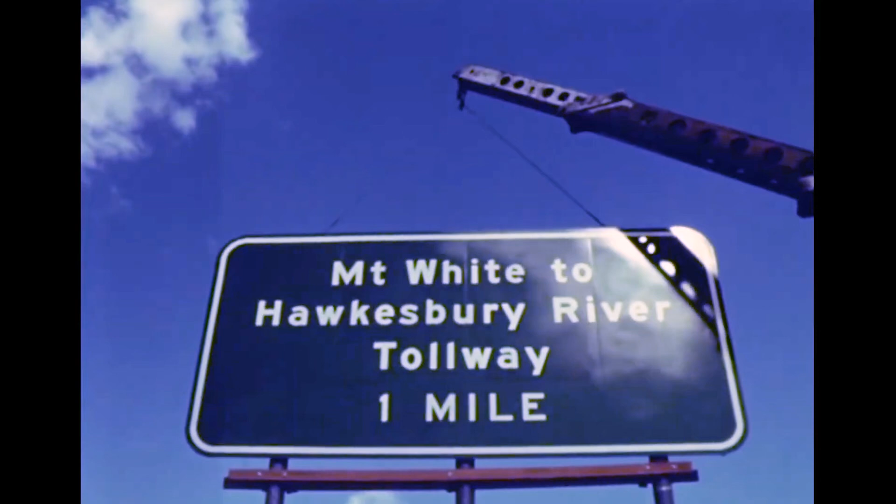All signs were manufactured at the Department of Main Roads Central Workshop at Granville, near Sydney. Easily read signs with large lettering were needed for the high-speed traffic. Where signs were required above travelling lanes, steel trusses were constructed to support them. The signs were of different colours and reflectorized. At interchanges where overhead lighting was to be provided, signs were illuminated by fluorescent tubes.

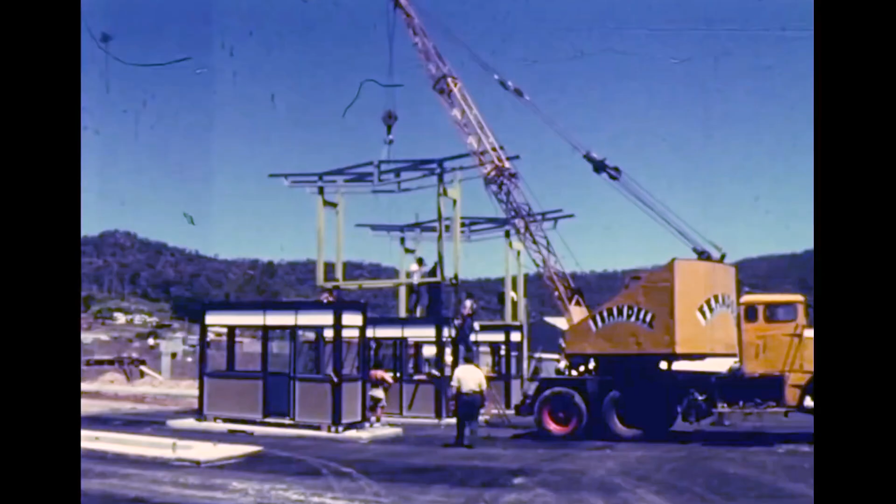Reflectorized delineators were placed at the outer edges of the road formation, using a red colour to indicate the left side and white for the right side of the carriageway. A blue colour was used on interchange ramps. Toll collecting facilities were provided at Mooney Mooney Interchange using prefabricated cabin units.

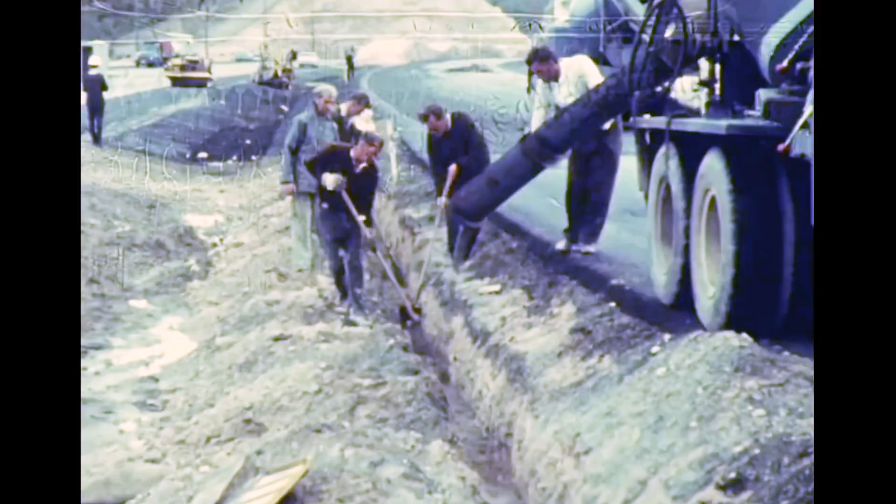Cables for emergency telephones were laid in trenches along the edge of the formation. They were protected by a layer of concrete. Telephones were erected at 3/4-mile intervals and connected to the administrative centre, from where an emergency patrol wagon operates in the event of breakdown or accident.

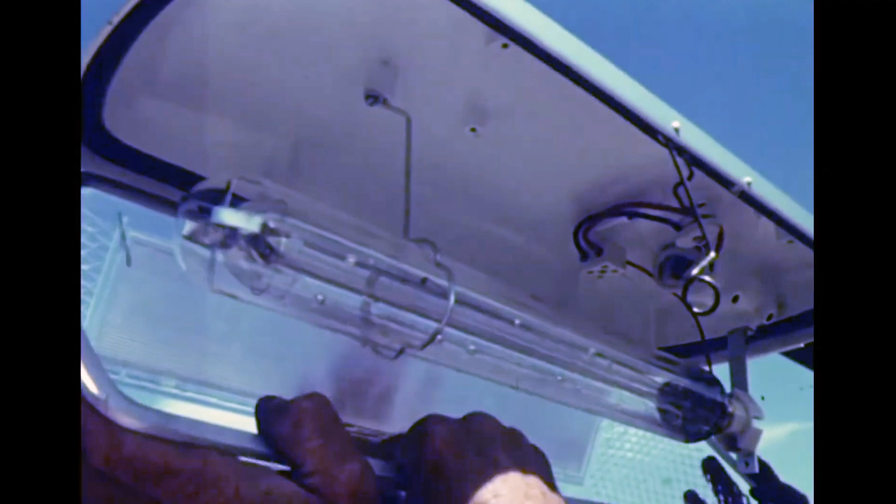Lamp standards were erected at all interchanges and toll barriers, which were illuminated with sodium vapour lamps to provide safe conditions for traffic entering or leaving the expressway at night. Lines were spray painted on the road surface to define travelling lanes. This was the final construction activity on the project.

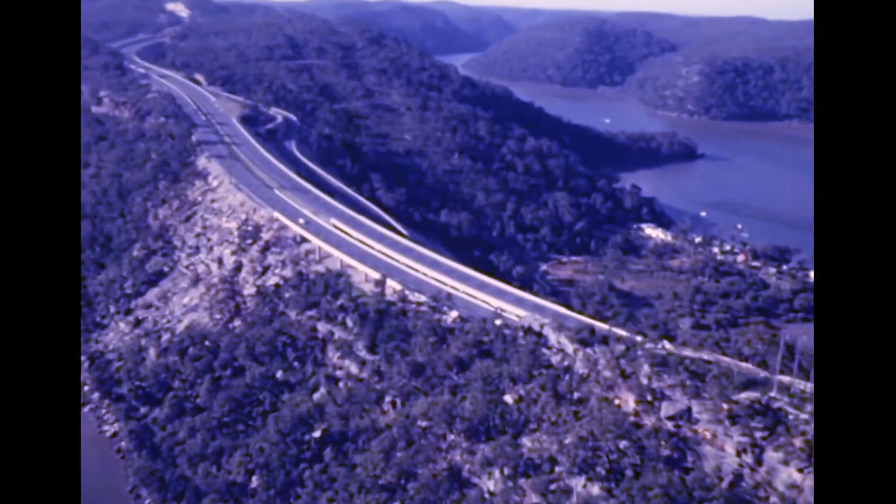In 1966, 3.5 years after its commencement, the first 10 miles of rural expressway in New South Wales was brought to completion. But this is not the end of the story. The fourth stage of construction is already proceeding on the southern side of the Hawkesbury River Valley towards Sydney. In the meantime, motorists using this road are now able to enjoy the comfort and convenience of fast travel under safe driving conditions.

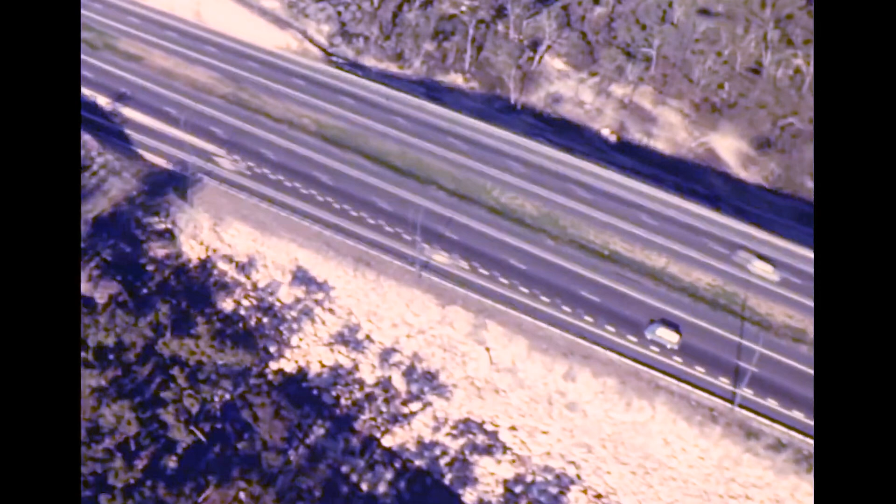The Department of Main Roads takes pride in the achievement of surmounting the great difficulties associated with the construction of an expressway of world standard through such rugged terrain, and plans to construct other similar expressways throughout New South Wales for the benefit of the travelling public and, indeed, the whole community.